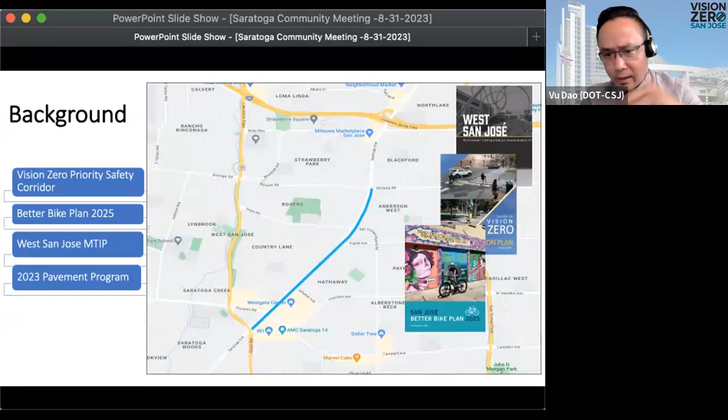So why Saratoga? Why this project? The city of San Jose recognized that one traffic death is one too many. Unfortunately, last year we lost 65 members of our community due to traffic violence. In 2015, San Jose adopted the Vision Zero Safety Initiative, which aims to reduce and ultimately eliminate traffic fatalities and severe injury crashes on our roadways. As part of that process, Saratoga was identified as one of the Vision Zero priority safety corridors with a high frequency of traffic-related crashes, which has a need for safety improvements.

The San Jose Better Bike Plan 2025 seeks to make bicycling safer and convenient for all ages and abilities in our city, and it recommended protected bike lanes on Saratoga. Currently, Saratoga does not have bike lanes. The West San Jose Multimodal Transportation Improvement Plan identifies Saratoga as one of the corridors to be considered for traffic safety improvements with features that would enhance safety for people walking, biking, or taking transit. Saratoga is also part of this year's pavement rehabilitation program, which provides a perfect opportunity to make changes to our roadway to make it safer and accommodate more modes of transportation. So all these plans and this opportunity help shape and guide us in making Saratoga safer.

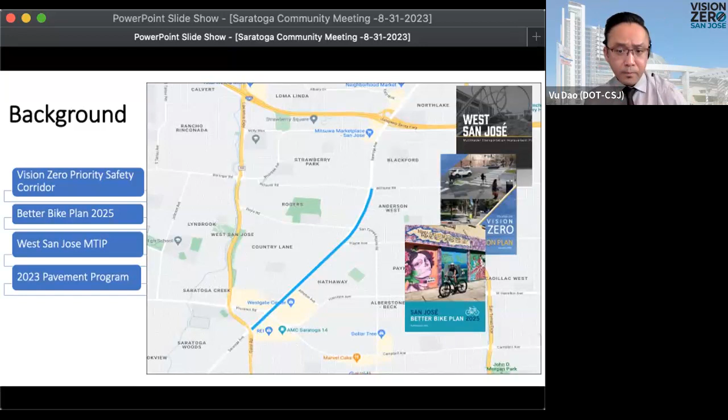Our primary objective is to improve safety for all roadway users. We want to make it safer for pedestrians, increasing their visibility, safety, and comfort. We also want to provide more protection for bicyclists, minimize conflicts, and create a lower stress environment for them to bike.

We want to make it safer in general by making improvements to the intersection and reduce vehicular speed. Speeding continues to be the leading known cause of traffic crashes that result in fatalities and serious injuries, so when we have the opportunity to redesign our roadways, we always aim to make speed less enticing.

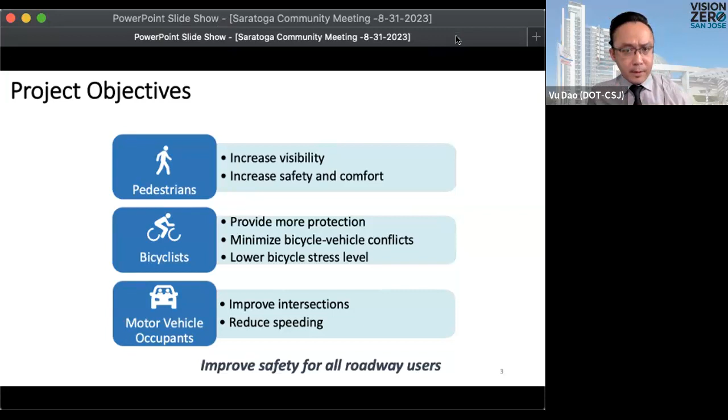So how do we do it? Here are the components of this project. Pavement resurfacing: the pavement will be treated, we'll replace the old pavement with new asphalt, and that will provide us with a clean canvas to work with. This is a typical practice we do where we leverage the pavement program to add safety improvements.

As part of that, we can reconfigure the excess travel lanes, taking it from 6 to 4 lanes, and reallocate that extra space to provide for better quality bike lanes. The bike lanes will be on both sides of the roadway and will extend for the entire project limits.

We will make improvements to the intersection, including high visibility crosswalk striping, bicycle detection, and minor traffic signal modifications to include hardware and signal timing upgrades.

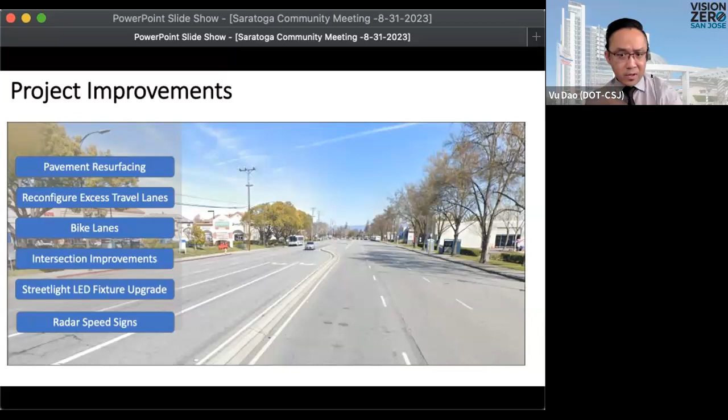We will be upgrading the existing old streetlight LED fixtures to newer ones, which will be brighter and even more energy efficient. And we will add several radar speed signs to alert drivers of their speed and help slow them down as they are traversing through this corridor.

So let's talk about the existing travel lane configuration. One of the key components of this project is to reconfigure the travel lanes. Saratoga has an inconsistent number of travel lanes.

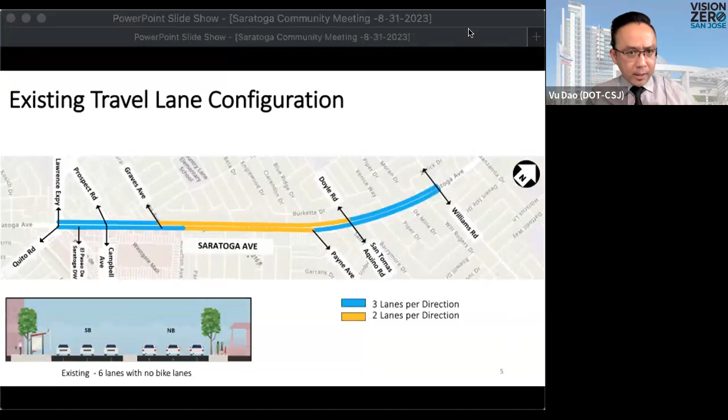And we can reallocate that extra space to protect the bike lanes. So how will it look? This is how it would look.

As you recall in the previous screen, the existing condition shows the yellow segment, or the 4-lane segment, only in the middle of the project limits. By extending the yellow segment to Williams and to Prospect, we create a continuous segment of 4-lane roadway going from Prospect to Williams.

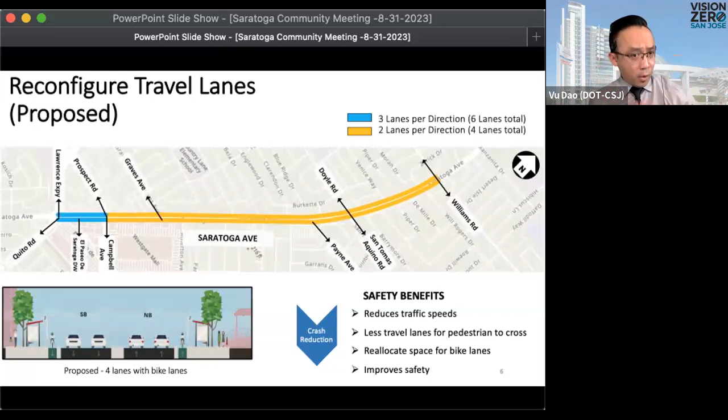Over the years, we have done many successful projects using this type of treatment. From our experience, we see there could be an increase in travel time, but the big trade-off is safety. It helps reduce vehicle speeds, reduce crashes, and improve safety for all roadway users.

Bike lanes: we talked a little about bike lanes, noting that Saratoga currently does not have any. The bike lanes will be new, striped on both sides, with appropriate signage to clearly delineate the spacing for bicyclists.

We can consider adding vertical delineators between the buffer area to provide more protection for the bicyclists. Our plan in the near future is to come back and upgrade this buffer area to a more permanent, substantial physical separation.

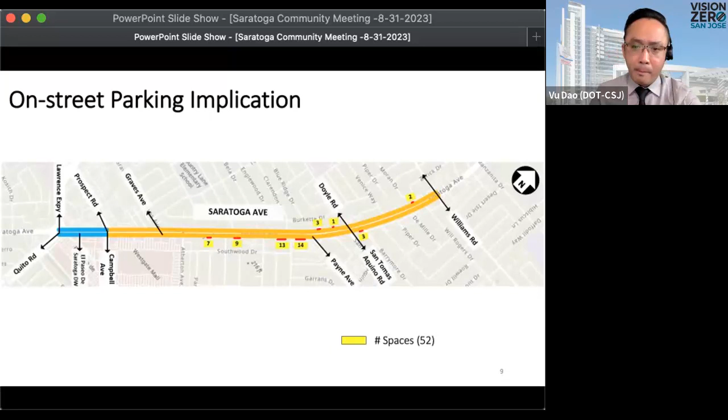Next steps: the next step is for us to finalize the permanent striping. Currently, as you may have seen, the pavement work has been completed, and the striping you see out there is temporary, not permanent. So this month and next month, we will finalize the permanent striping before the contractor comes in to stripe it permanently with thermoplastic striping.

After that, we will have the improvements I mentioned: the radar signs, the streetlights, and several other things covered during my presentation.

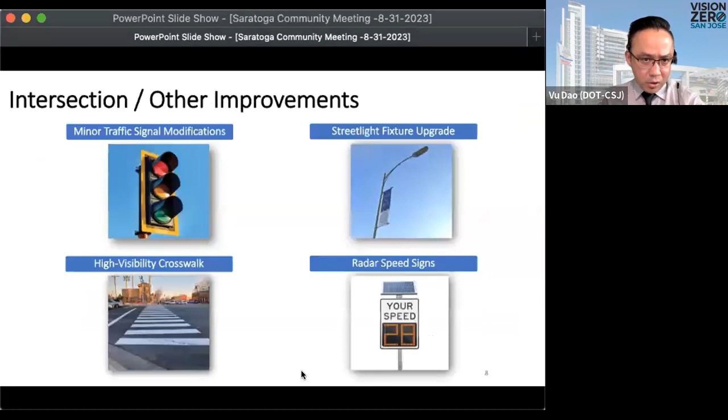To jump off the conversation, I see that Mike in the chat asked, when will the physical barriers be put up to make the bike lanes a true Class 4? Yes, that is correct. Mike, thank you for your question, apparently you know a lot about bike lanes. Class 4 is protected bike lanes, and Mike is referring to the physical barriers between the bike lane and the travel lane, in the buffer area, to provide more protection for bicyclists. We are looking at potentially upgrading the buffer area to more substantial civil improvement, but depending on the timeline, if we see that it will not be coming in the near future, then we will be putting up delineators, which are the plastic posts you've seen in the bike lane images I showed. At this moment we need to clearly understand the timeline, but if the future work is not within the foreseeable future, we will go out there and put these up. They're relatively easy to put up, considered quick-build material, relatively affordable, quick and easy to install and remove. Thank you for your question.

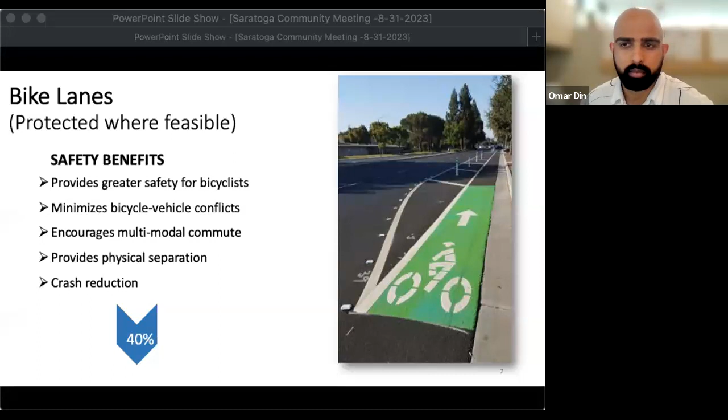From our team, we don't have that, but I'm going to look to my colleagues in the department who work in different divisions to see if any counts were done. I'm looking to you, Zahi and Wilson, if you're in the room. For this project, we did not look at how many bikes are going through Saratoga. I know it's part of the Better Bike Plan 2025, and I'm not sure if as part of that major study they specifically looked at each segment to understand the bike volume. I'll defer to my colleagues if they know it was studied as part of the Bike Plan 2025.

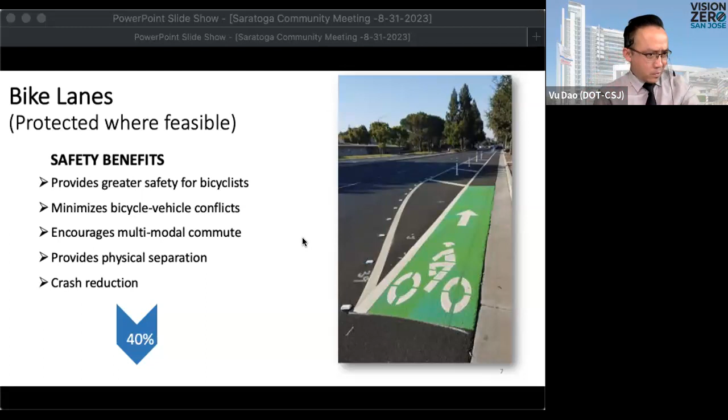I don't have that information offhand, unfortunately, but when we collect volumes or counts for vehicles, we do count for bikes as well. Those volumes we collect are typically correlated with some sort of project, whether it's a private development impact, or like Vu mentioned, the master plan or complete street study. For your specific project, Vu, I know we did an analysis but it didn't actually collect new volumes, it relied on existing volumes. There are two folks I can check with, either Wilson or Ryan, to see whether the bike plan or corridor study collected volumes and would have those bike counts. But typically the bike count is going to be very minuscule if you don't have the facility. Keep in mind we're introducing a brand new facility. If the facility didn't exist at all, then your count isn't going to be relevant to this project.

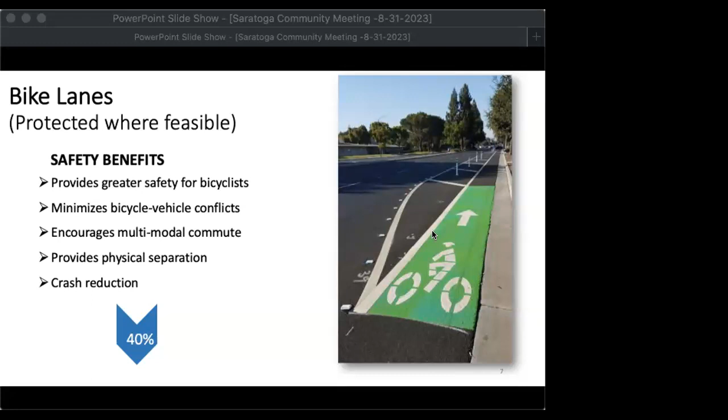I can add briefly on our bike plan. City Council adopted a new bike plan in October 2020, which Vu mentioned at the beginning of this presentation. The bike plan looked at ways to increase access and improve safety for people riding bikes across the city, knowing that streets like Saratoga that don't have bike lanes, or have very basic bike lanes, aren't really conducive to people riding. Maybe the people who are most comfortable would use them, but the majority wouldn't. So one reason for taking on progressive design like we have here is to encourage more people to ride and give them space. The bike plan looked more at assessing the needs people have, the reasons why people do or don't ride where they do, and best practices and other things like land use, safety, and the transportation network in general. It did not specifically look at the number of people riding bikes on any corridor.

Okay, thank you. Can I just quickly add, sorry? Yes, please. Just to add to the last question, as Zahi said, development projects such as Costco and El Paseo, as part of their transportation impact studies, used recently collected data for their operational analysis. If you'd like a copy of the data used for those studies, we can send it to you. But also note that because of the pandemic, the data we use is from the pre-pandemic situation, so looking at 2019 data, if that makes sense.